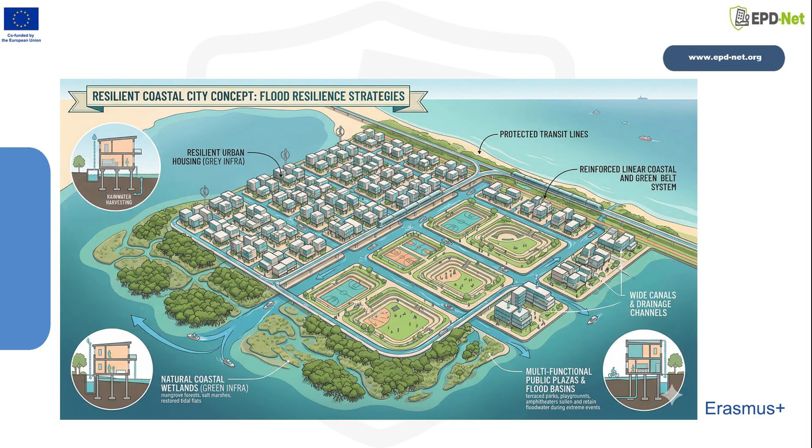By the end, you should be able to explain key concepts, recognize the main tools, and discuss how global frameworks and ethics shape resilient, equitable outcomes. Here is the roadmap. We begin with why urban flood resilience matters and how flood risk forms, from rainfall to impacts. Then we connect ecological principles and ecosystem services to the spatial organization of cities, because land cover, soil, and urban forms strongly influence runoff, flow paths, and who is exposed.

Next, we review the data foundations and the modeling toolbox, including how resolution and scale choices affect what you can confidently conclude. From there, we look at how future climate and land use change alter assumptions, and we compare nature-based, gray, and hybrid infrastructure strategies. We then shift from technical options to planning practice, policies, zoning, scenario testing, and robust decision-making. Finally, we ground the concepts with two case studies and close with practical takeaways you can use in planning work, studio projects, and interdisciplinary collaboration.

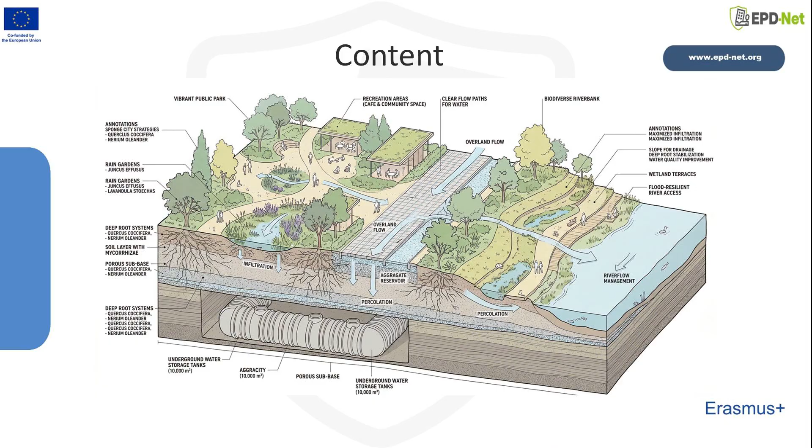As we go, notice the recurring theme. Decisions about land use and public space can either amplify runoff and exposure, or provide room for water and safer development patterns. These are the learning objectives for topic 4101, aligned to the course learning outcomes. First, you should be able to define basic concepts and principles of sustainable development and environmental planning, and explain why they matter for flood resilience.

Second, you should describe how ecological principles and ecosystem functions relate to spatial organization and urban environments, especially how landscapes provide regulating services like water storage and flow attenuation. Third, you should explain, at a general level, how climate adaptation and infrastructure planning support environmental sustainability, including the role of modeling and scenario thinking.

Fourth, you should identify key global and regional frameworks that guide environmental planning practice, such as the Sustainable Development Goals, the Sendai Framework, and major flood risk policy instruments. Finally, you should show awareness of ethical responsibility and teamwork, because resilience planning always involves trade-offs, uncertainty, and diverse stakeholders. We will revisit these outcomes at the end for self-check.

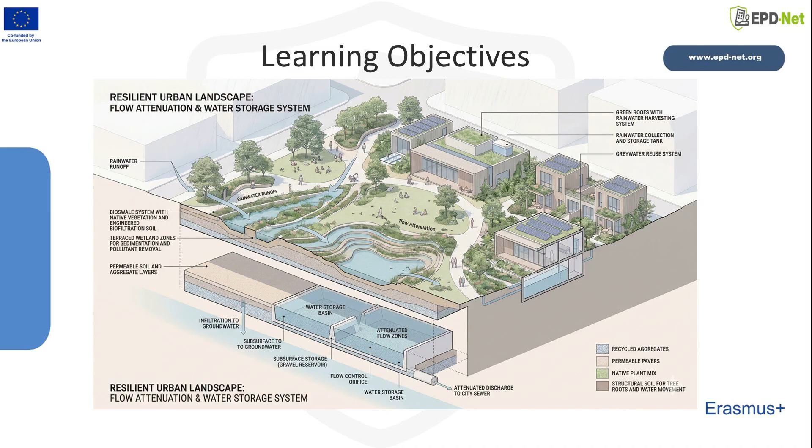Briefly, why does urban flood resilience matter? Cities concentrate people, assets, and critical infrastructure, so even a short-duration flood can cascade into transport disruption, business interruption, health risks, and long recovery periods. Importantly, urban flood risk is not driven by a single cause. It emerges from the interaction of changing rainfall patterns, urbanization and impervious surfaces, altered drainage pathways, and the limits of existing infrastructure capacity.

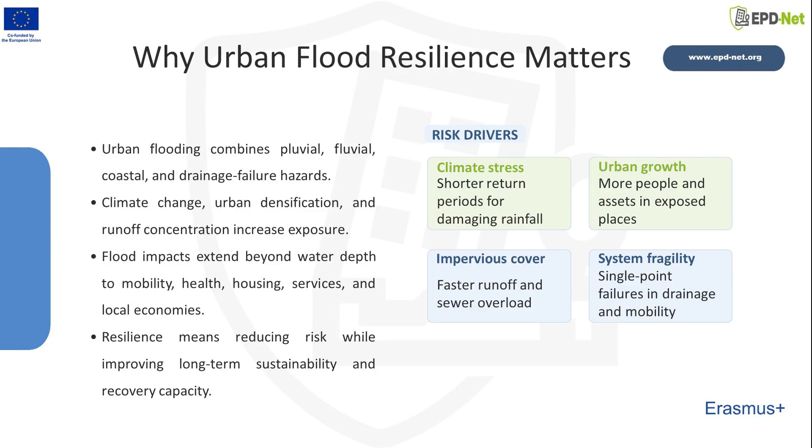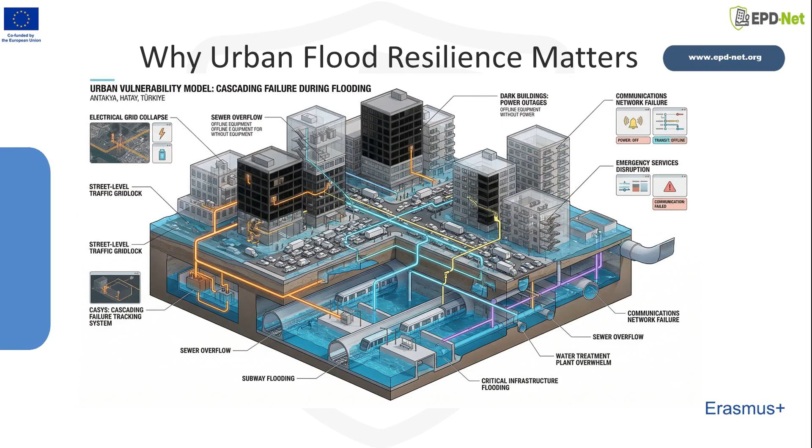From an environmental planning standpoint, resilience means shaping the city so that flood impacts are reduced and recovery is fair. That includes where development happens, how density is managed, how open space functions, and how services are protected. A resilient strategy also recognizes that different neighborhoods experience different levels of exposure and vulnerability. So the goal is not just to bounce back, but to reduce risk over time, avoid locking in harm, and improve the ability of all residents, especially the most vulnerable, to cope with future events.

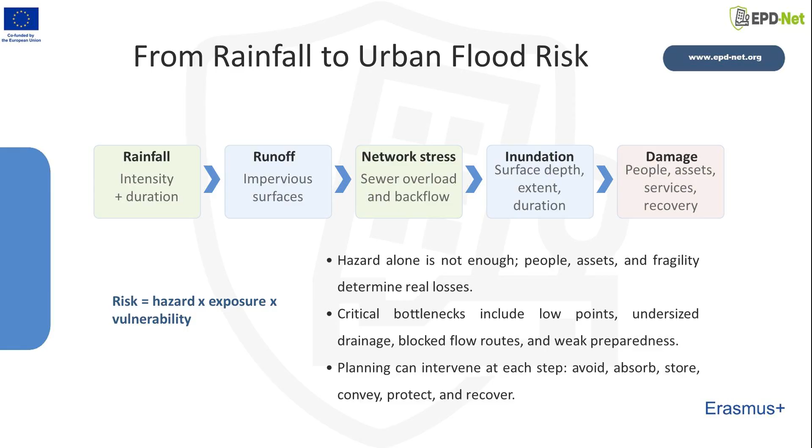This slide frames flood risk as a chain rather than a single moment. Start with a hazard, rainfall intensity and duration, then consider how the catchment and the city convert rainfall into runoff. Runoff becomes surface flow. Flow interacts with drainage and topography, and only then does water reach people, buildings, and services. Impacts depend not only on water depth or velocity, but also on what is located in the flow path and how prepared the community and institutions are.

The planning implication is powerful. You can intervene at multiple points. Upstream and at source measures reduce runoff. Spatial planning can reduce exposure by steering critical functions away from flood-prone areas or by designing safe overflow routes.

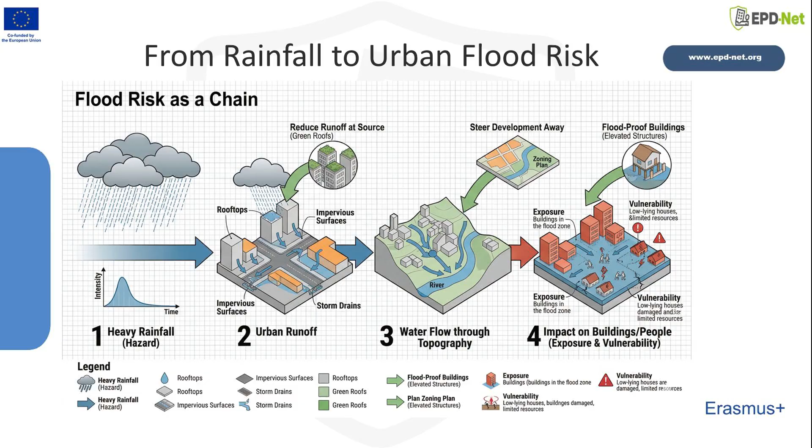Vulnerability can be reduced through building standards, warnings, and social support systems. In practice, the strongest approaches combine hazard reduction, exposure management, and vulnerability reduction, because no single measure is sufficient under real-world uncertainty. Topic 4101 also requires connecting ecological principles to urban environments.

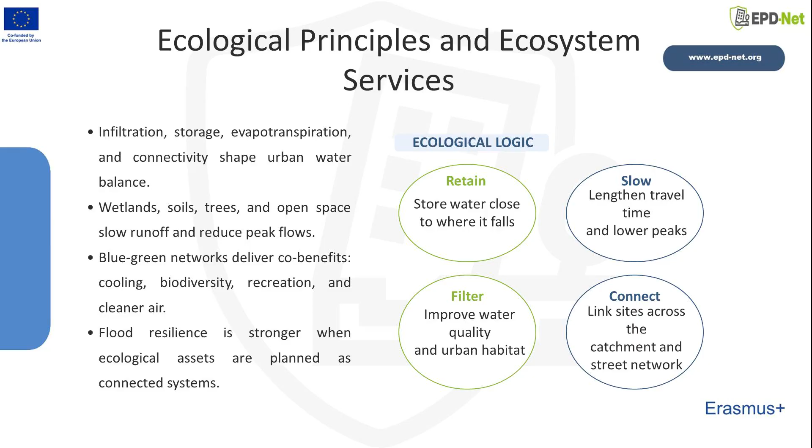In flood resilience terms, ecology is not decoration, it is functional infrastructure. Natural systems store water in soils and vegetation, slow down overland flow through roughness and root structure, and enhance infiltration where soils and groundwater conditions allow. Wetlands, floodplains, parks, and permeable corridors can act as buffers that reduce peak flows and provide space for water during extreme events. These processes are often described through ecosystem services.

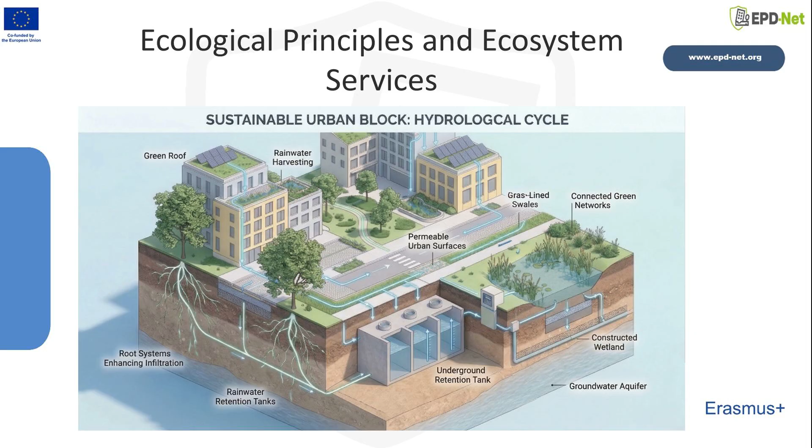For flooding, the key services are regulating services, water retention, filtration, and flow moderation, but there are co-benefits: biodiversity, cooling, recreation, and improved public space. For environmental planners, the point is to design spatial patterns that protect and restore these functions. That means thinking in systems, catchments, green networks, and urban form working together, and avoiding fragmented green patches that look good but do little for hydrological performance.

Spatial organization is where environmental planning most directly shapes flood outcomes. Exposure and vulnerability are not random. They are produced by land use decisions, housing markets, infrastructure siting, and historical planning choices. A flood map may show a hazard zone, but the real question is, what did we put in that zone, and who lives or works there?

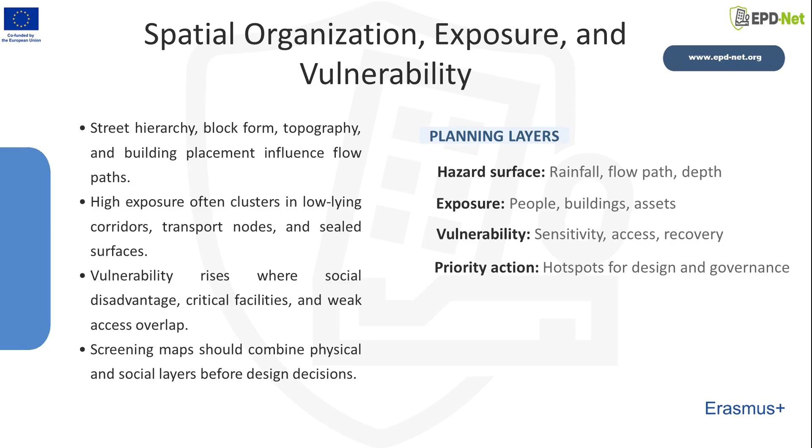On this slide, consider how the same rainfall can create very different impacts depending on urban form. Dense impervious surfaces generate more runoff. Barriers like road embankments can redirect flow and create unexpected ponding. Informal or low-quality housing may be more vulnerable to damage. Critical facilities, hospitals, power substations, transit hubs, create systemic risk if they are exposed.

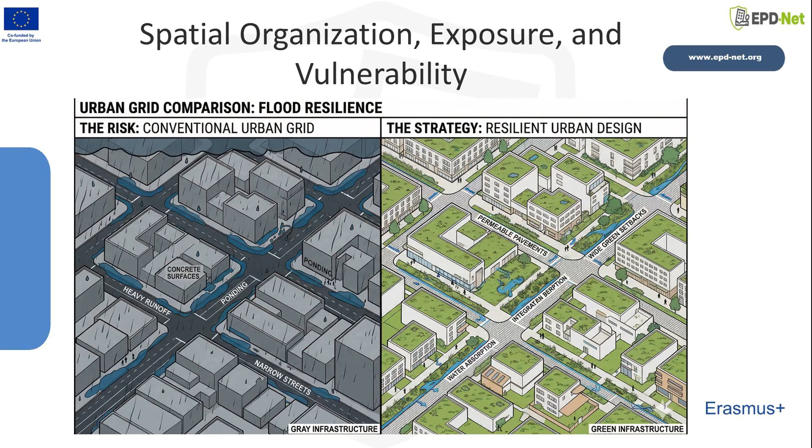Planning tools, zoning, setbacks, open space networks, and development control can reduce exposure. Social policy and inclusive engagement can reduce vulnerability. Together, they translate ecological understanding into spatial strategies that improve resilience without relying solely on hard infrastructure upgrades.

Good decisions depend on good data. Urban flood assessment typically draws on topography, land cover, soils, drainage networks, rainfall records, and information on people and assets. In practice, you often work with imperfect, heterogeneous datasets. Digital elevation models can miss small features like curbs, walls, and micro-depressions, yet those features strongly affect flow routing. Land use layers may be outdated or too coarse to represent recent development. Social data can be sensitive and unevenly available.

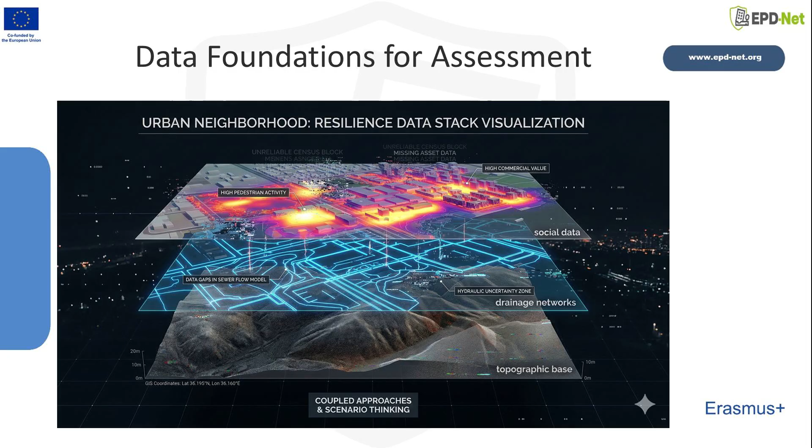The key planning lesson is to treat data as an uncertainty to manage, not as a reason to avoid analysis. Start by clarifying the decision you need to support, screening hotspots, prioritizing interventions, or evaluating alternatives, and then match the data effort to that purpose. Document assumptions, check consistency across layers, and look for decision-relevant accuracy rather than perfect precision. Where data are weak, combine quantitative layers with local knowledge, site visits, and stakeholder input to avoid blind spots.

Urban flood modeling spans a toolbox, from simple screening methods to detailed hydrodynamic simulations. Conceptually, models translate rainfall and catchment conditions into runoff and water movement, and then into metrics such as inundation depth, extent, duration, or potential damages. Different models answer different planning questions. At one end, you have rapid methods, index-based screening, simplified runoff calculations, or GIS-based flow accumulation, to identify likely hotspots and support early planning discussions.

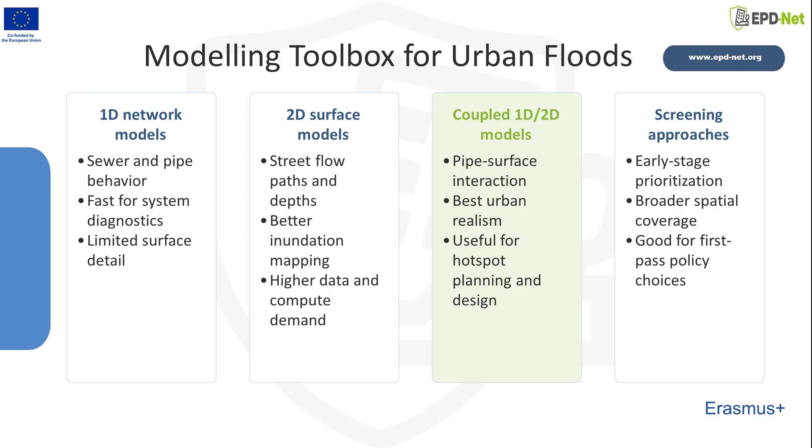At the other end, hydrodynamic models can represent surface flow and drainage interactions, producing detailed maps that are useful for design and evaluation. Between these extremes are coupled approaches that link land use change scenarios with hydraulic models, or combine 1D drainage representation with 2D surface routing.

For planners, the most important skill is model literacy, knowing what a model can and cannot claim. Ask, what processes are represented? What data does it require? What is the uncertainty? And does the model output actually support the decision you are making?

Resolution and scale choices are central to model credibility. A model with very fine spatial resolution can represent more detail, but it demands higher quality input data and more computation. If the elevation data, drainage inventory, or rainfall inputs are uncertain, making the grid smaller does not automatically make the results more trustworthy. Conversely, a coarse model may miss local flow paths and underrepresent small but critical flooding problems, such as ponding at underpasses or near blocked inlets.

A practical approach is to choose resolution based on the decision context. For city-wide prioritization, a coarser approach may be appropriate if it reliably identifies relative hotspots. For evaluating a specific neighborhood intervention, finer resolution and targeted data collection may be justified. Always communicate scale limitations. Outputs are not truth, they are decision aids. Finally, remember that scale also includes time. Short intense storms require different temporal resolution than longer events.

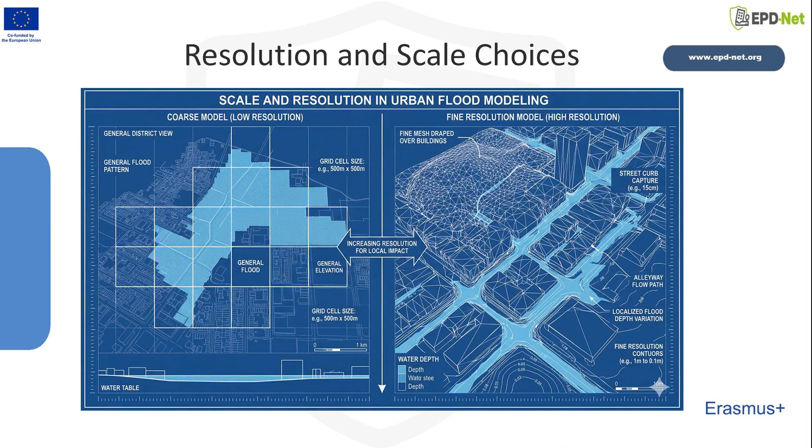Matching spatial and temporal scale to the planning question is a hallmark of defensible analysis. Flood risk is dynamic because both the hazard and the city are changing. Climate change introduces shifts in rainfall intensity patterns and increases uncertainty around design assumptions that were built on historical records. At the same time, land use change, densification, expansion into peri-urban areas, loss of vegetation, and increased imperviousness often increases runoff and reduces natural storage.

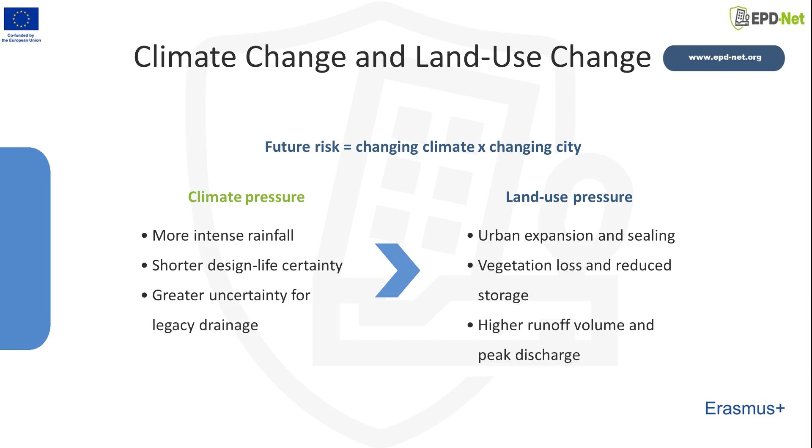For environmental planning, this means avoiding one scenario thinking. Instead, use scenario analysis. Explore multiple plausible futures for climate, development, and policy. The goal is not to predict the exact future, but to identify strategies that work reasonably well across a range of conditions. This is where adaptive pathways become valuable. Implement near-term actions that provide benefits now, while keeping options open to adjust as new information emerges.

In practice, this mindset changes how you interpret model outputs. Rather than seeking a single, best, design storm, you test sensitivity, identify tipping points, and prioritize flexibility, especially for investments with long lifetimes like land use patterns and major infrastructure.

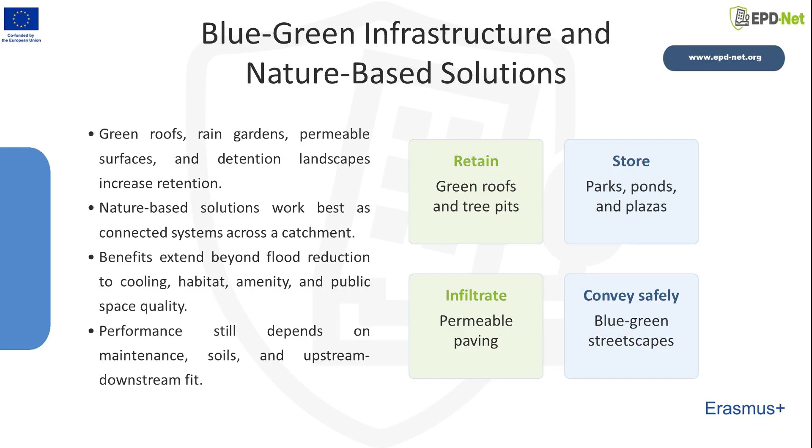Blue-green infrastructure and nature-based solutions are central tools in sustainable flood resilience. Blue-green interventions include parks designed for temporary storage, green corridors that provide conveyance routes, green roofs that reduce and delay runoff, rain gardens and bioswales that capture water locally, and restored floodplains or wetlands where space allows. The shared idea is to work with natural processes, storage, infiltration, evapotranspiration, while providing additional urban benefits.

From a planning perspective, the strength of blue-green infrastructure is its multifunctionality. It can contribute to flood mitigation and simultaneously improve biodiversity, heat comfort, air quality, and the quality of public space. However, it is not magic. Performance depends on soil conditions, maintenance, design capacity, and where interventions are placed within the catchment. Equity matters too. Benefits should not be concentrated only in high-income areas.

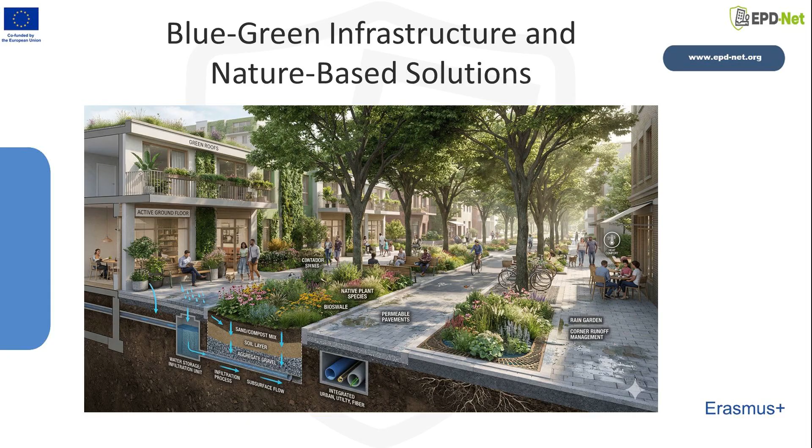A defensible planning strategy treats nature-based solutions as part of a system, integrated with zoning, street design, and drainage upgrades, and evaluated under the same rigorous scenario testing as gray infrastructure. Gray infrastructure refers to engineered drainage and flood control systems, pipes, culverts, detention tanks, pumping stations, flood walls, and channels. These measures can be effective for specific design conditions, especially where dense urban form limits space for storage.

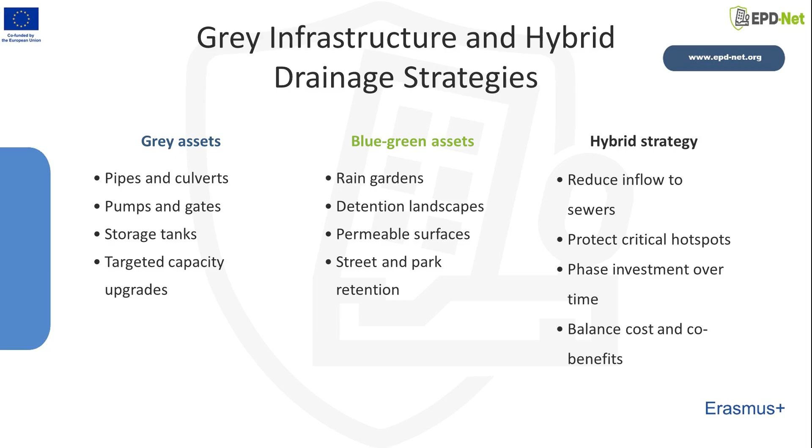But gray-only strategies face limits under changing climate extremes, aging assets, and high retrofit costs, and they can shift risk downstream if not catchment aware. That is why many cities move toward hybrid strategies, combining gray capacity improvements with blue-green measures and spatial planning. Targeted pipe upgrades can be paired with upstream retention, permeable surface policies, and designated safe exceedance pathways in streets.

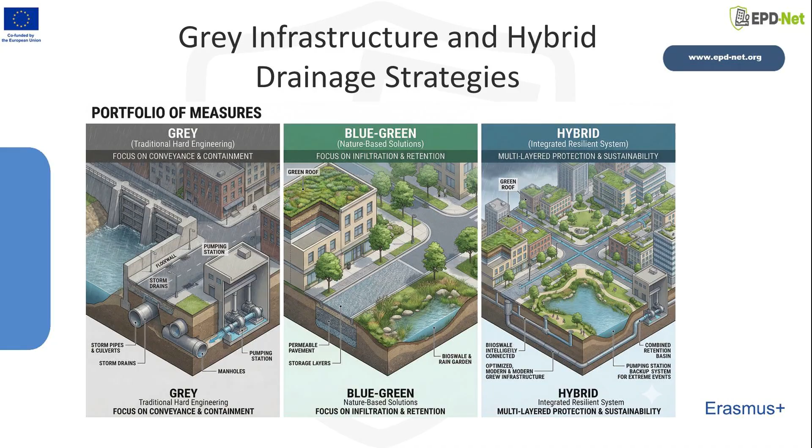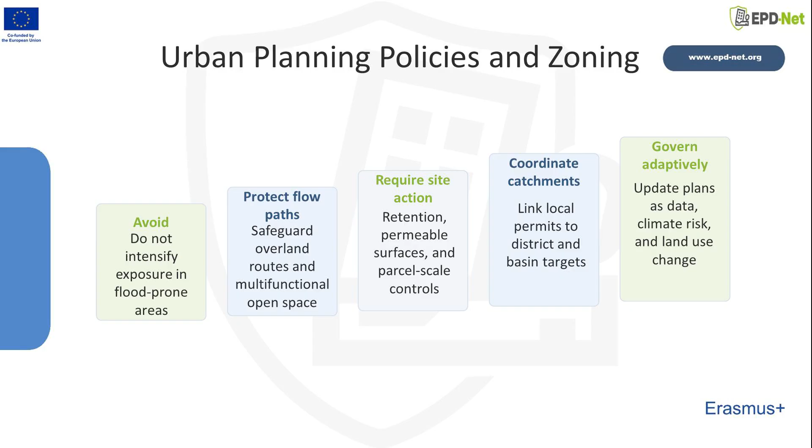For planners, the decision is rarely green versus gray. It is how to assemble a portfolio of measures that reduces risk, delivers co-benefits, and remains credible under uncertainty. Urban planning policies and zoning translate flood risk knowledge into enforceable decisions. This includes steering new development away from high-risk areas, limiting vulnerable land uses in flood-prone zones, requiring elevation or flood-proofing, and protecting open space networks that provide storage and safe flow routes.

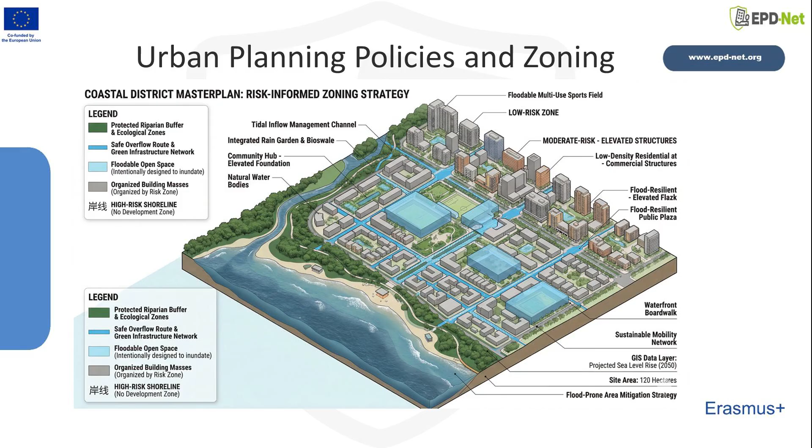Planning also influences risk indirectly through density, street layout, and the location of critical facilities. Risk-informed planning uses flood assessments to guide where growth occurs and what conditions apply to approvals. Policies can require site-level stormwater controls, cap imperviousness, or mandate green infrastructure integration. Street design can also incorporate multi-use spaces that safely accommodate occasional flooding. Implementation requires coordination across land use plans, infrastructure budgets, and emergency management, plus periodic updates as risk and data evolve.

Scenario testing and robust decision-making help planners act under uncertainty. Rather than asking, "What is the single best solution for one forecast?" robust approaches ask, "Which strategies perform acceptably across many plausible futures?" This matters for flooding because rainfall extremes, urban growth, and behavioral responses are uncertain.

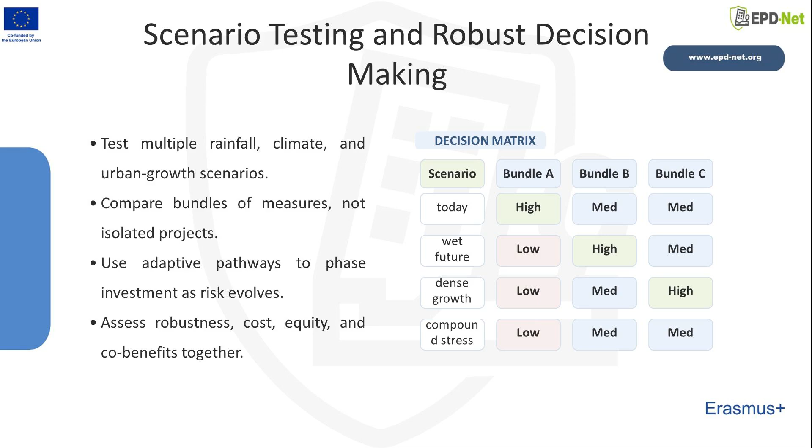In practice, you define performance metrics, such as reduced inundation in critical corridors or protection of essential facilities, and test candidate strategies across multiple scenarios. Strategies that consistently meet thresholds are preferred. If none performs well everywhere, you design adaptive pathways, sequences of actions that can be adjusted over time, with clear triggers for when to escalate.

Robust methods support transparent trade-offs. They reduce overconfidence in a single model run and help justify decisions to stakeholders. They also allow non-technical criteria, equity, co-benefits, feasibility, to be assessed alongside hydrological performance.

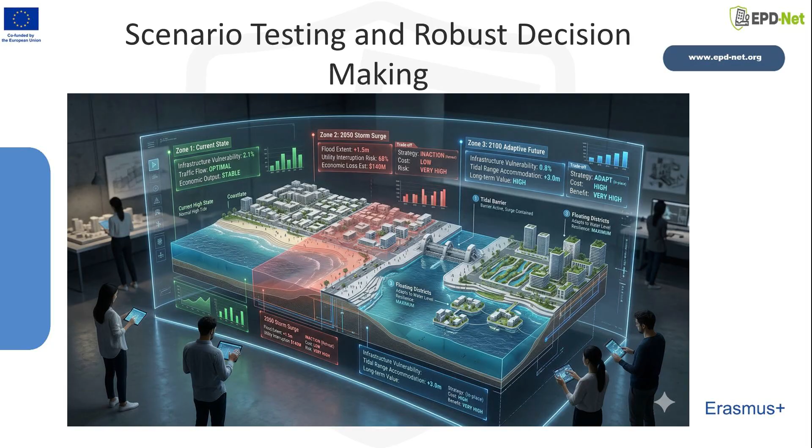Frameworks guide sustainable planning by turning broad goals into responsibilities and evaluation criteria. At the global level, the Sustainable Development Goals, especially SDG 11 on sustainable cities, emphasize inclusive, safe, resilient, and sustainable urbanization. The Sendai Framework for Disaster Risk Reduction similarly highlights understanding risk, strengthening governance, investing in resilience, and improving

preparedness and recovery. At the regional level, policy instruments such as the EU Floods Directive formalize processes, risk assessment, hazard and risk mapping, and flood risk management planning, typically on a cycle with updates. National adaptation plans and disaster management strategies then translate these principles into country-specific priorities. Finally, local comprehensive plans, zoning codes, and infrastructure programs operationalize them on the ground.

For learners, the message is that flood resilience is not optional or ad hoc. It is embedded in governance frameworks. Knowing these frameworks helps planners justify interventions, coordinate across departments, and design plans that are defensible under public scrutiny and regulatory review.

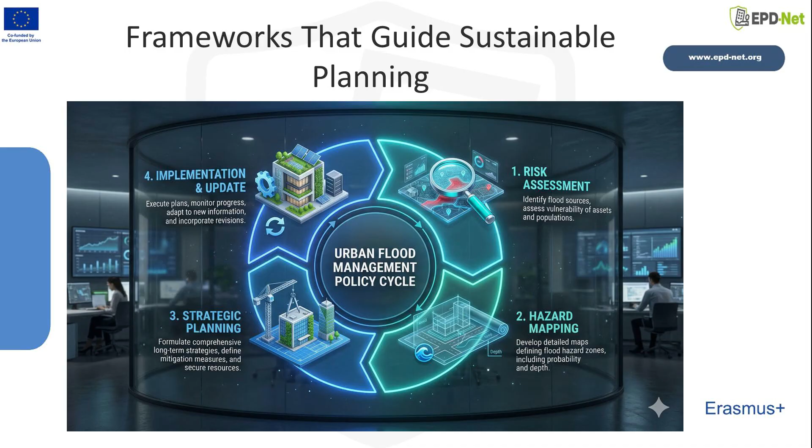Ethics, equity, and teamwork are not soft add-ons. They determine whether resilience planning is legitimate and effective. Flood risk often falls disproportionately on low-income households, informal settlements, and communities with less political voice. If planning decisions ignore these patterns, interventions can unintentionally reinforce inequality by protecting high-value districts first, displacing vulnerable residents, or creating green upgrades that drive gentrification.

Ethical responsibility in environmental planning means making distributional impacts visible and addressing them explicitly. That includes inclusive engagement, transparent criteria for prioritization, and attention to accessibility and co-benefits. It also means communicating uncertainty honestly, avoiding false precision, and acknowledging that technical models do not replace public values.

Teamwork is essential because flood resilience crosses disciplines and agencies: planners, engineers, ecologists, public health officials, emergency managers, and community groups. Effective teams establish shared problem definitions, agree on data and assumptions, and use clear decision processes. As you move into practice, aim to be a translator between technical evidence and planning choices, keeping fairness and long-term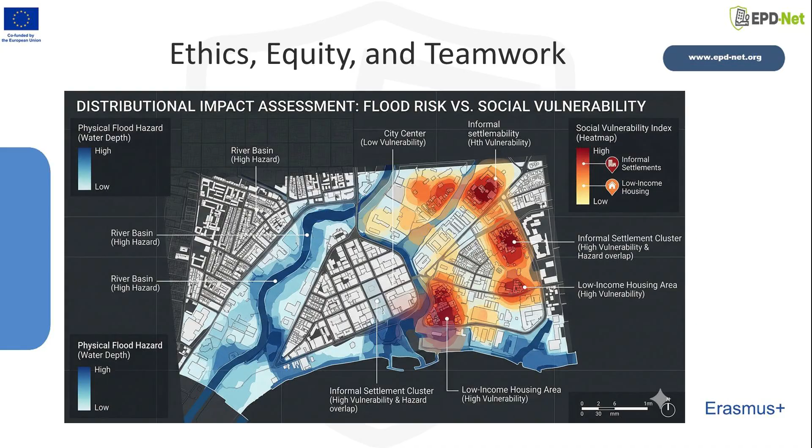sustainability at the center. Best Case 1 illustrates how scenario-based modeling can support concrete planning actions. In the Zhengzhou case, a coupled hydrodynamic modeling approach was used to explore inundation patterns under multiple rainfall scenarios and urban conditions. The value for planners is not just a map, it is the prioritization logic that maps enable. By consistently identifying recurring high-risk zones, often near low-lying areas, river-adjacent corridors, or constrained drainage pathways, the analysis helps target where interventions matter most. Planning translation can take several forms.

First, the city can focus monitoring and maintenance on key bottlenecks. Second, spatial controls can limit new vulnerable development in hotspots. Third, infrastructure upgrades can be staged, beginning with locations where multiple scenarios converge on risk. Fourth, emergency planning can pre-designate safe routes and shelter locations based on modeled flow paths.

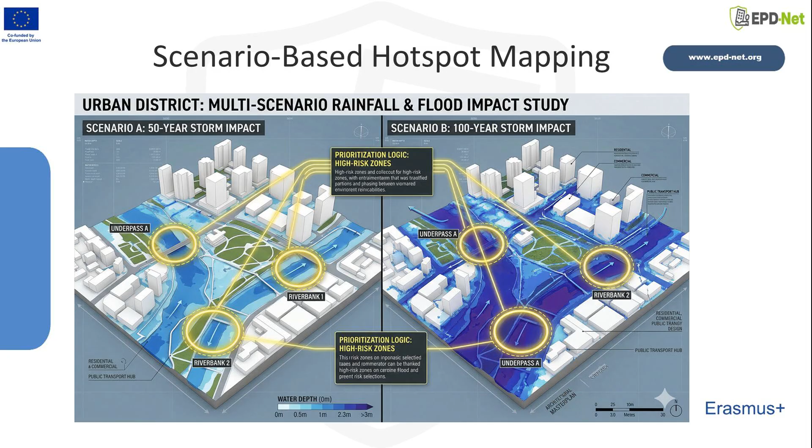The broader lesson is that models are most useful when they are scenario-based, linked to decisions, and paired with clear communication about assumptions and uncertainty. Best Case 2 highlights adaptive planning under uncertainty, using Melbourne as an example of evaluating multiple combinations of climate futures, development pathways, and adaptation options.

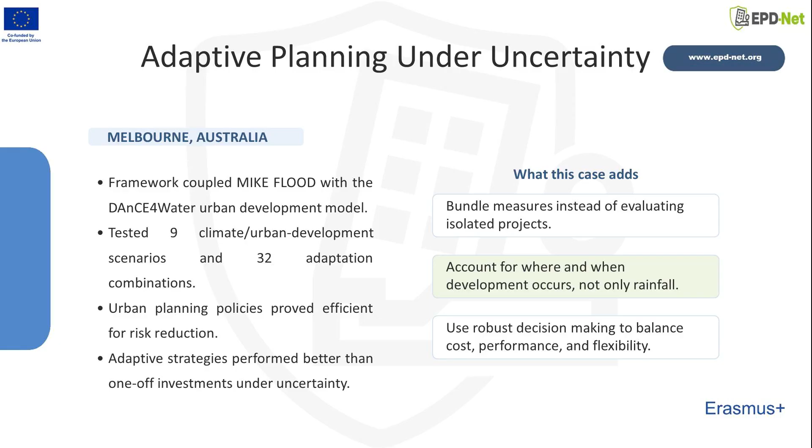The key insight is that fixed, one-off investments can perform poorly if the future diverges from the assumed scenario. Adaptive strategies, implemented in stages, with monitoring and triggers, can maintain acceptable performance across a wider range of conditions. In this type of framework, the city tests policy instruments alongside infrastructure measures. Limiting exposure through land use policy can be highly cost-effective because it prevents new risk from being created, while incremental drainage or storage upgrades can be timed to match observed changes.

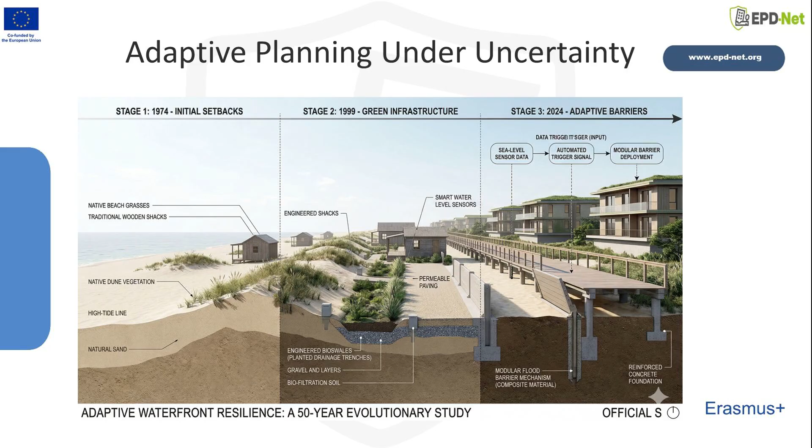For environmental planners, the lesson is to treat resilience as a long-term governance process. Act now, learn, and keep options open. To close, the key message of topic 4101 is integration. Urban flood resilience improves when sustainable development principles, ecological systems, spatial planning, infrastructure choices, and governance frameworks are treated as one connected field of environmental planning.

Conceptually, remember the risk chain: hazard, runoff, flow, exposure, vulnerability, and recovery. Practically, remember the portfolio: blue-green measures, gray capacity, hybrid strategies, and risk-informed land use policy. From an evidence standpoint, use models and data as decision support, not as unquestionable truth. Choose tools that match the scale and purpose, be explicit about uncertainty, and test strategies across scenarios.

From a governance standpoint, use frameworks like SDG 11, the Sendai framework, and flood risk policy processes to align local plans with broader responsibilities. As you apply these ideas, start small and be explicit. Define your decision question, list assumptions, and identify who benefits and who bears risk. In studio or professional settings, document alternatives, compare them with clear criteria, and communicate trade-offs in plain language.

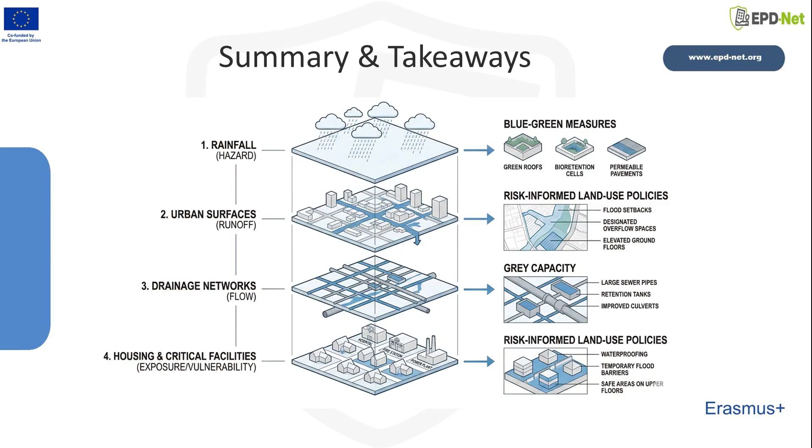Finally, keep ethics and teamwork central. Resilience that protects only some neighborhoods is not sustainable. The goal is planning that reduces risk over time, supports environmental quality, and distributes benefits fairly.